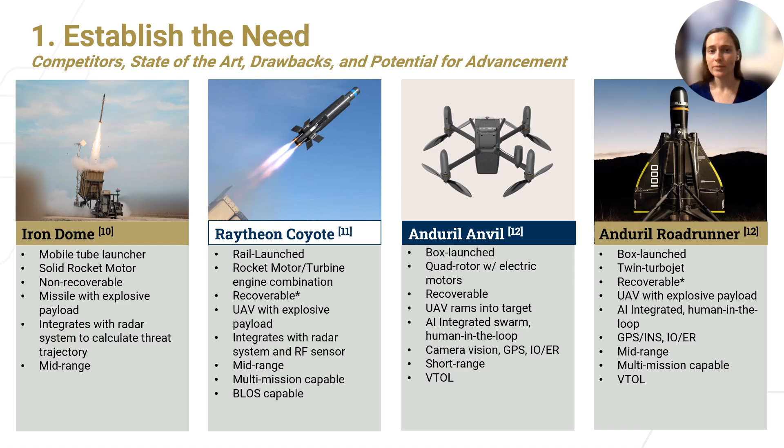The downside to all four of these systems, though, is their cost, ranging from about $40,000 for an Anvil interceptor to $100,000 or more for variants of Coyote and Roadrunner. Coyote, Anvil, and Roadrunner are reusable, though, depending on the mission executed and whether or not an explosive payload was required. All of these systems require pre-positioning and planning prior to their deployment in the field.

Going a little deeper into each of our competitors' missile defense strategy, Iron Dome's effective radius ranges from about 5 to 70 kilometers with Tamir interceptors, and is most effective as part of a layered defense strategy. Due to the limited number of interceptors available, the launchers are integrated with radar systems to selectively intercept only incoming missiles on trajectory to hit critical infrastructure. The system is highly effective, boasting an intercept success rate of greater than 90%, but it's also costly, ranging from $50,000 to $100,000 per interceptor.

The payload is a fragmenting explosive, weighing about 11 kilograms. The Coyote system, developed by Raytheon, can either be rail-launched or launched from a sonobuoy canister, depending on the variant. Block 1 Coyote, shown below, can be equipped with a variety of sensors, including weather observation for NASA, communications relays, or explosive payloads for the counter-UAS missions.

It is designed with deployable wings and can loiter for an extended period of time. However, it is limited by weather conditions and only operable in light rain and moderate winds. The Block 1 Coyote carries a payload weighing about 2 kilograms. Payload capacity of Blocks 2 and 3 Coyote are not publicly available.

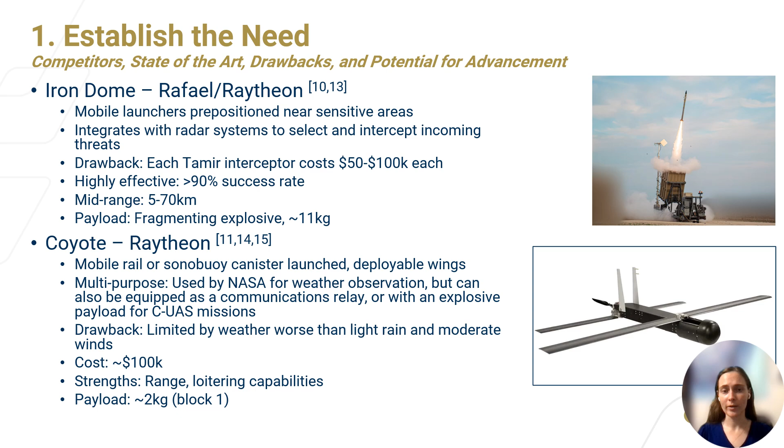Anduril's integration with Lattice enables a layered defense strategy leveraging multiple types of interceptors to counter a variety of threats. Both Anvil and Roadrunner are launched from boxes, which can be integrated into urban environments and provide monitoring of UAV health and status. Anvil is a fast, lightweight interceptor, achieving speeds up to 200 miles per hour at a cost of about $40,000. However, it is limited in range and endurance. Only the Anvil M variant carries an explosive payload, estimated at less than a kilogram.

Roadrunner is designed for larger counter-UAS missions. Its top speed is estimated to be about 450 miles per hour, with an endurance between 30 and 60 minutes. Cost is the limiting factor for Roadrunner interceptors, from about $100,000 to $500,000. Payload data is not published by Anduril, but estimated to be between 10 and 20 kilograms. Each of these four interceptors discussed has unique strengths and weaknesses, and a slightly different take on the trade-off between cost and performance.

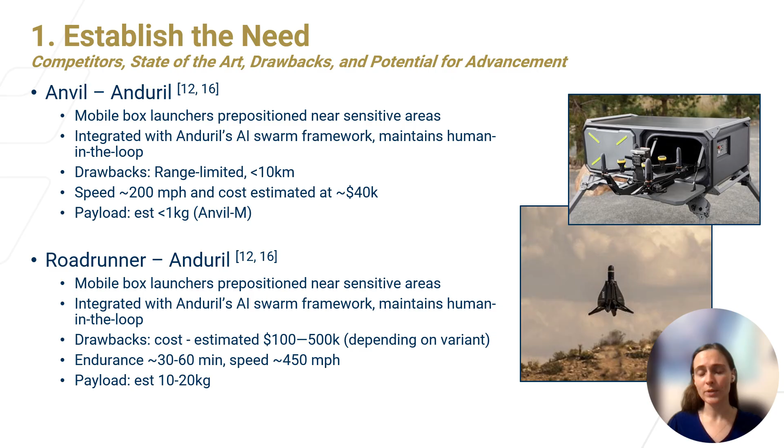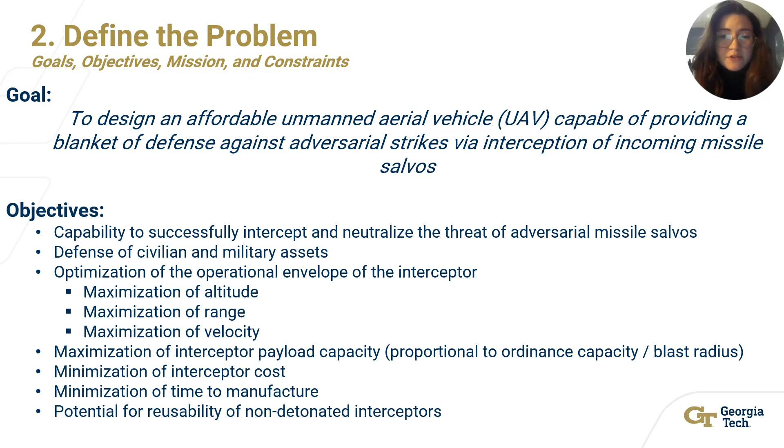Thanks, Caitlin and Trent, for establishing the needs. I'm Lily, and I'll be covering problem definition. The goal to solve this problem is through designing a low-cost drone which can defend against incoming salvos. This will be achieved by completing 7 objectives, with themes of maximizing coverage of the interceptor while minimizing the cost and time to manufacture. Through a concept of operations, or ConOps, the proposed mission is visualized.

Initially, infrastructure will exist like hangars, runways, and local ground stations. There, the system will be ready when the possible detection of an incoming threat is received by existing missile defense system satellites. Once the signal is assessed, it is determined to be a threat. The request to launch the interceptor will be sent to the local ground station. That's when last-minute preparations like opening the hangar doors and activating the interceptors are triggered before launch.

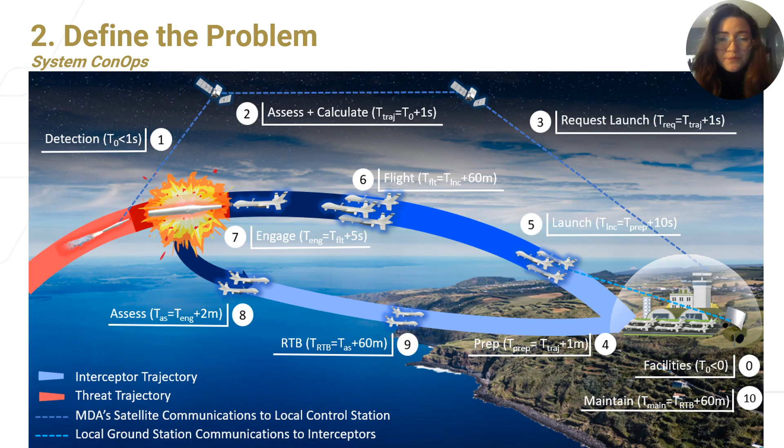While in flight, the drones receive updates from the local ground station. The swarm of interceptors will engage the salvos as necessary, and remaining interceptors will return to base, or RTB. While awaiting the next mission, maintenance can occur. All of these mission stages correspond to some functional need of the system. To complete a Defeat the Threat Salvos mission, it must be able to be launched quickly, detect and track the missiles, fly, navigate, receive commands, destroy, and communicate back to the ground system.

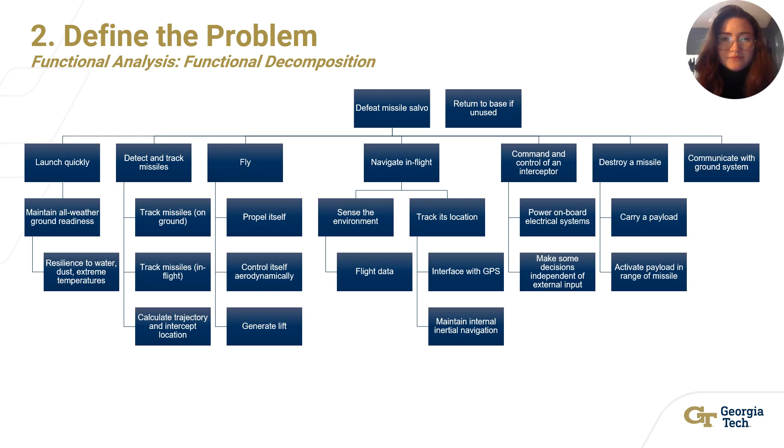However, each of these functions is more complex than that. Like the function of flying can be examined as needing to propel itself, control its aerodynamic features, and generate lift. The mission stages can be simplified from 10 to 5, consisting of pre-launch, launch, in-flight, defeat, and reset. This flow block diagram combines the mission objectives with the needed functions to better understand the problem.

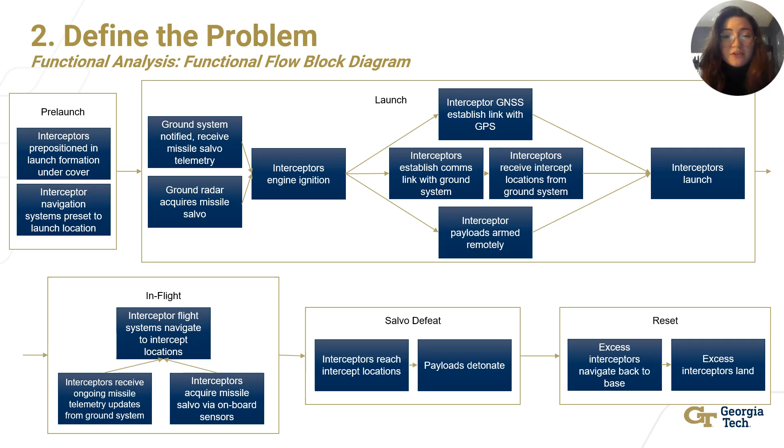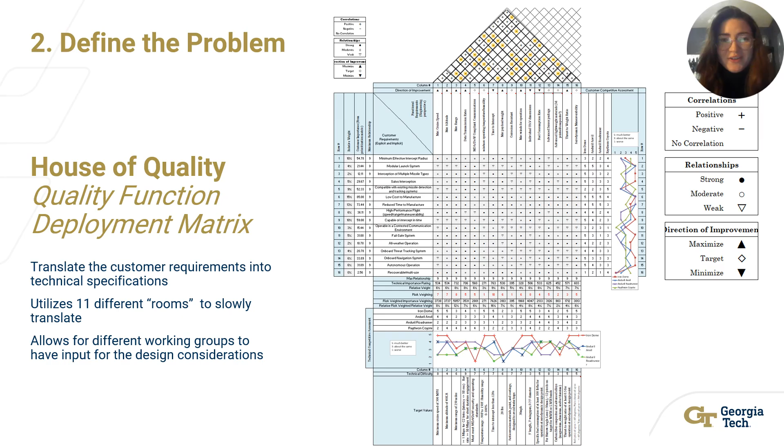With such an in-depth understanding of the needs, the system can begin to be defined. This is completed by a house of quality with 11 different rooms, starting with the requirements from the customer. These were explicitly listed as items such as being low cost, quick to manufacture, and actually intercepting. However, through further understanding the customer's perspective, unknown customer needs like interception of multiple types and all-weather operations are identified.

Engineers can translate their customer requirements into measurable characteristics with target values like having a large range of 250 miles, carrying up to 20 pounds of payloads, or having a thrust-to-weight ratio of greater than 0.5. These ensure the proposed solution is actually meeting customer needs.

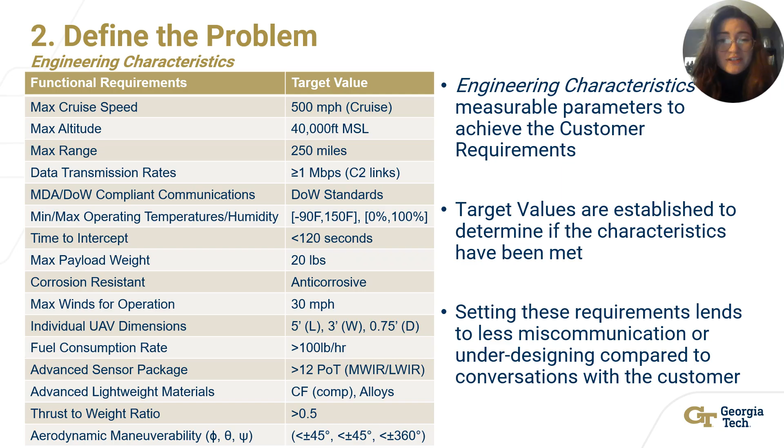As shown in room 3, it's critical that engineering requirements are actually capturing the voice of the customer, so areas of strong relationships, like many requirements capturing the need of reduced manufacturing time, are identified.

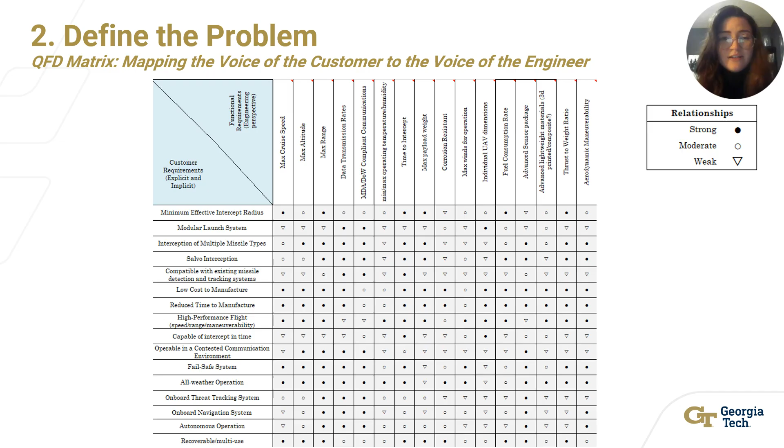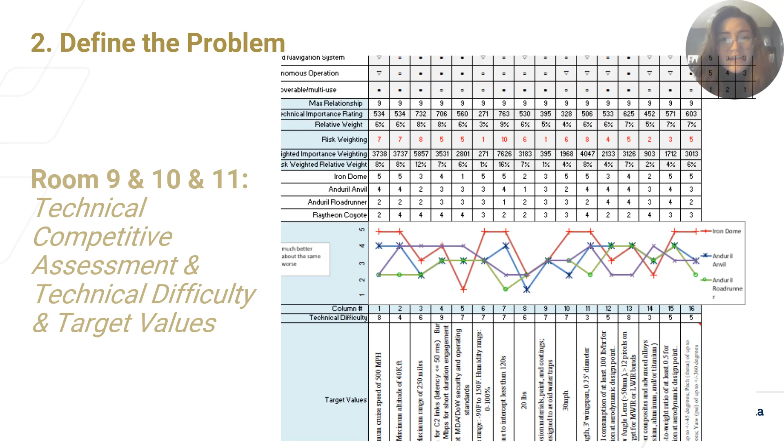The remaining rooms show the correlations among the functional requirements, the ratings of customer needs, the importance of engineering characteristics, and assessing existing products, and a technical assessment of products against our solution.

In this section, we identify what matters most for choosing the right interceptor configuration. Our guiding idea is simple. The propulsion choice and the airframe choice determine whether the system can actually intercept missiles fast enough, high enough, and cheaply enough to scale. We start with the major performance metrics from the requirements. We care about time to intercept because the vehicle must reach incoming missiles before they hit defended assets.

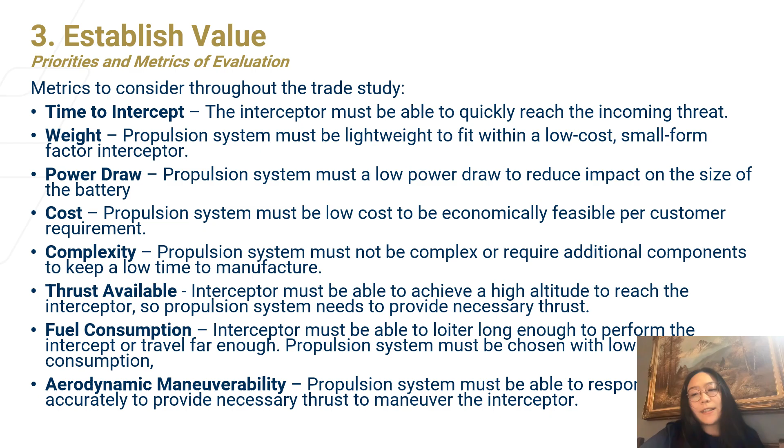Weight and power draw matter because this is a low-cost interceptor. Every subsystem must stay compact and efficient. Cost and complexity directly connect to manufacturability, one of the customer's highest rated needs. And thrust, maneuverability, fuel consumption, and altitude performance all determine whether the interceptor can actually reach and destroy high-speed threats.

To analyze this systematically, we then break the system into the major subsystems: propulsion, instrumentation, payload, power, and structure, because each contributes differently to altitude, speed, and responsiveness. The instrumentation block becomes especially important since navigation, tracking, communication, and guidance sit at the core of missile interception.

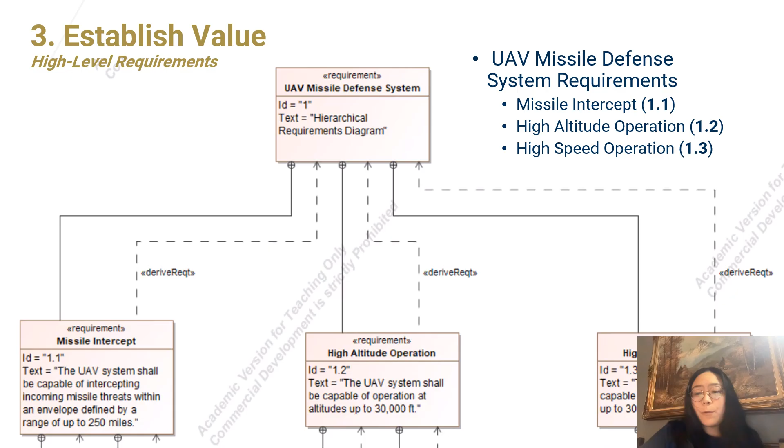Using the subsystem level requirements and the decomposition in the slides, we map everything back into high-level system needs, including missile intercept performance, high-altitude flight, and high-speed travel. This set of metrics forms the basis for the trade study. They tell us what matters most for the stakeholder needs and system ConOps when we compare propulsion and airframe combinations. And these are demonstrated in detail.

For propulsion, we evaluate 4 families: turbo alternators, turbofans, turboprops, ramjet or scramjet systems. Turbo alternators give high power to weight ratios and low cost. Turbofans offer very high thrust and altitude capability, but at higher cost and complexity. Turboprops provide fuel efficiency at lower speed, making them attractive before an intercept. Ramjets and scramjets provide extreme speed but come with major development risk, material demands, and cost uncertainty.

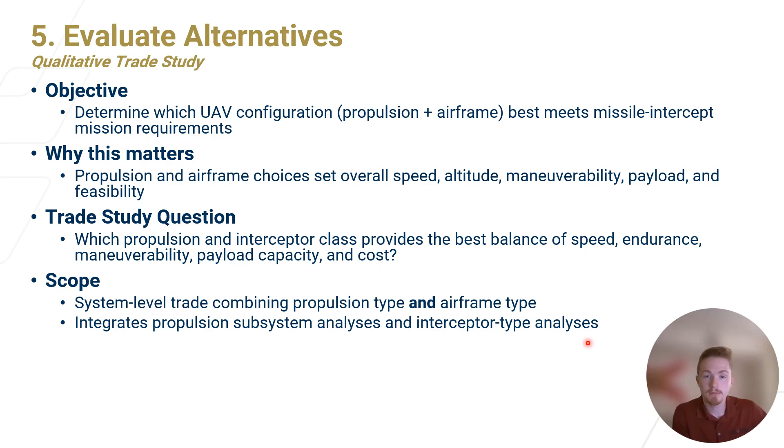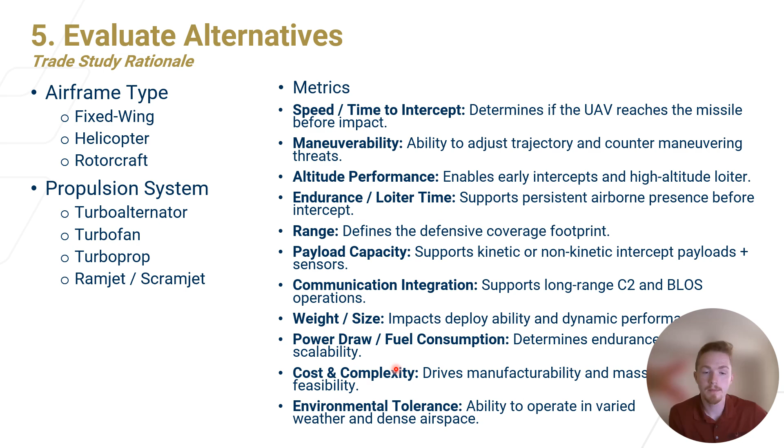As for the scope, the system-level trade combining the propulsion and airframe type is what we will be performing. We'll be integrating the propulsion subsystem analyses and interceptor type analyses. We'll primarily be concerned with the following metrics: speed, or time to intercept. These two metrics are very intimately connected. Maneuverability, altitude performance, particularly the maximum altitude envelope. Endurance, or loiter time. Range, payload capacity, communication integration, weight and size, power draw and fuel consumption, cost and complexity, and finally, environmental tolerance.

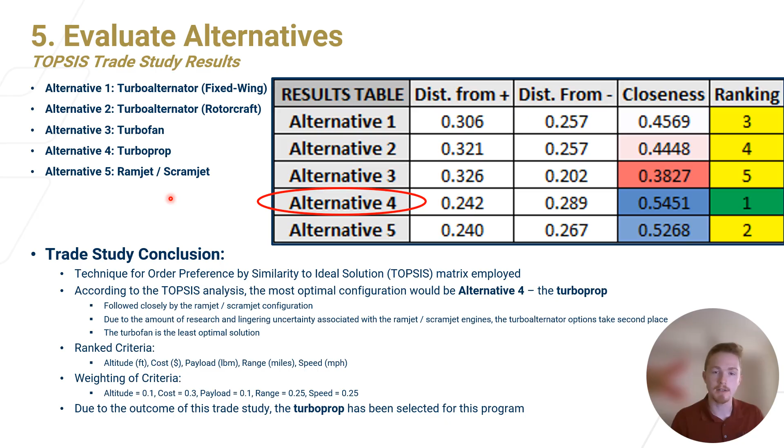Hi, my name is Noah Cortez, and I'm going to go over the concept that we landed on.

So the design that we landed on is a fixed-wing turboprop design. We found that was the best trade-off and the best point for cost and payload capacity. This comes in at about $60K per interceptor, which is much cheaper than the existing missile interceptors on the market right now. This has a 20-pound explosive payload, which is comparable to other interceptors that are targeting this kind of high volume, low cost, low tech missile.

It's got a 250-mile range, 500 mile per hour cruise speed, and a 30,000-foot ceiling. We emphasize COTS technology, standard parts, and manufacturing processes to make it easy to produce and maintain, to keep the system operational downrange as much as possible.

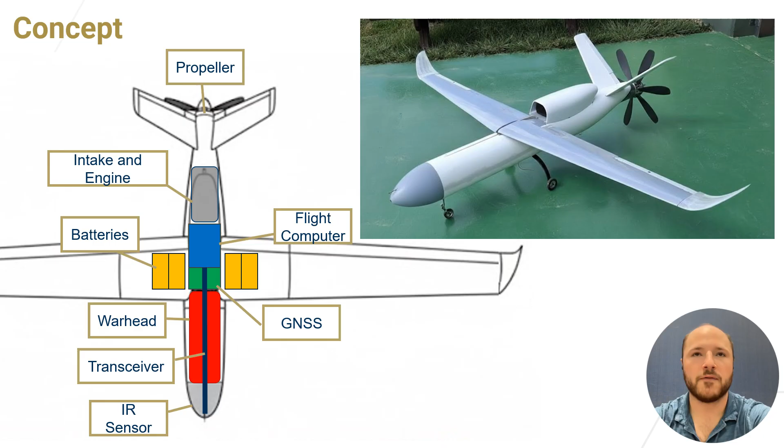You see we have a turboprop, we have the intake in the engine, we've got batteries, flight computer, the explosive warhead, transceiver, and an IR sensor for tracking the missiles in flight, in addition to receiving telemetry updates from the ground systems and the missile defense network.

The operation that we have here is the facility will create a dedicated hangar and short runway for the system. To have an alert posture, there's an elephant walk arrangement for salvo defense with 18 interceptors ready to go at all times. And then there are personnel and equipment on hand in the hangar to prep the next round of interceptors for the next salvo.

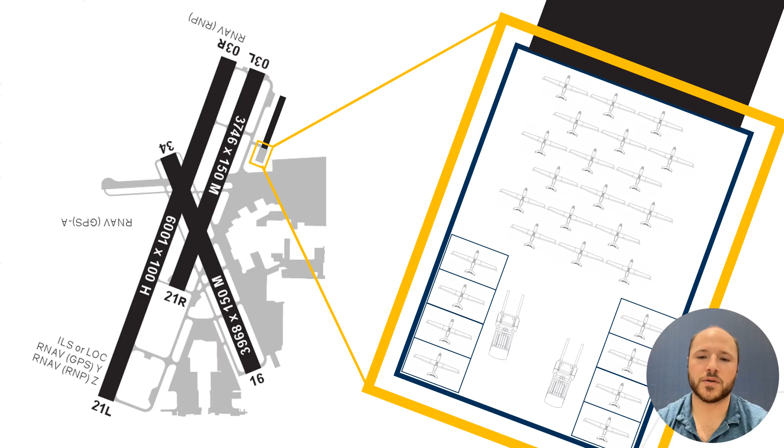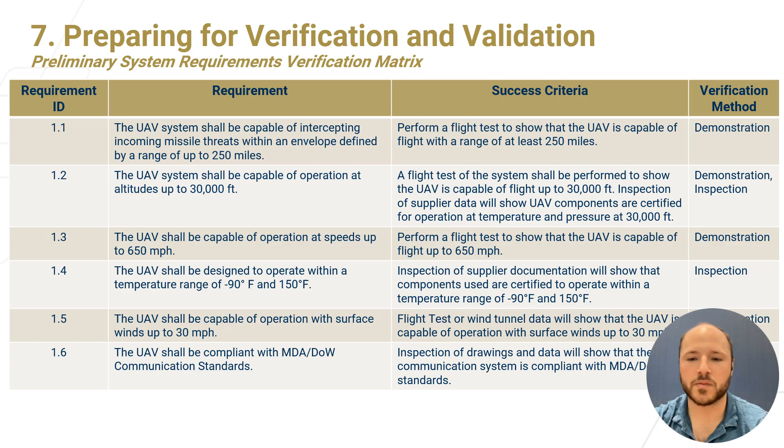Okay, so now I'm going to talk about preparing for the verification and validation of our requirements. We had a good blend of demonstration, analysis, test, and inspection. We leaned most heavily on demonstration to show that our system meets the performance requirements. Where possible, we're planning on doing some live fire testing with some real missile systems to prove that it does work as we say that it works. These are just all of the verification testing methods that we have.

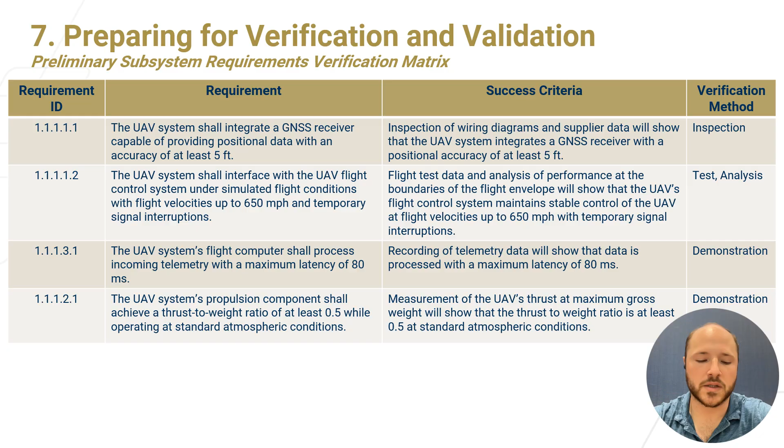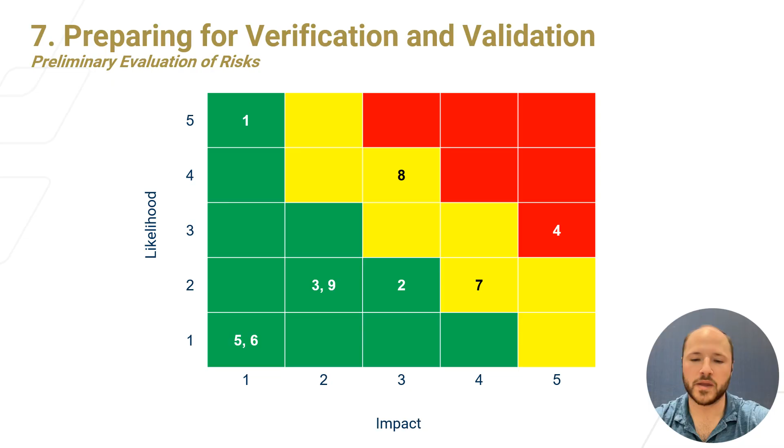So here's the risk matrix for our design. With the missile defense mission, failure has a very, very high impact because almost certainly you're going to have loss of life depending on the accuracy of the adversary missiles. So we went ahead and mitigated a bunch of risks baked into the design directly, but there are three that I want to focus on that we can see in the yellow and the red. That's 4, 7, and 8.

So risk number 4 is that competing programs remove support for the program. The way that we're going to address that is to rapidly achieve program milestones to reduce the amount of time for the program to be killed. If we can move quickly, then we can get through our program faster than somebody can realize what's going on and try and kill it, and we can field our systems quickly.

Number 7 is that the adversaries will send mixed salvos of high-tech and low-tech missiles. The way that we're mitigating that risk is maintaining that communication link between the interceptors and the ground systems and the existing missile tracking networks to make sure that we have high accuracy and high resolution telemetry data, so that the interceptors are talking to one another in the air, and then interfacing with existing missile systems, especially higher end ones like the Patriot missile systems, to make sure that for a mixed salvo, we are defending those appropriately.

And then number 8, the dedicated hangar protects the interceptors from the harsh environment so they can maintain a ready posture at all times.

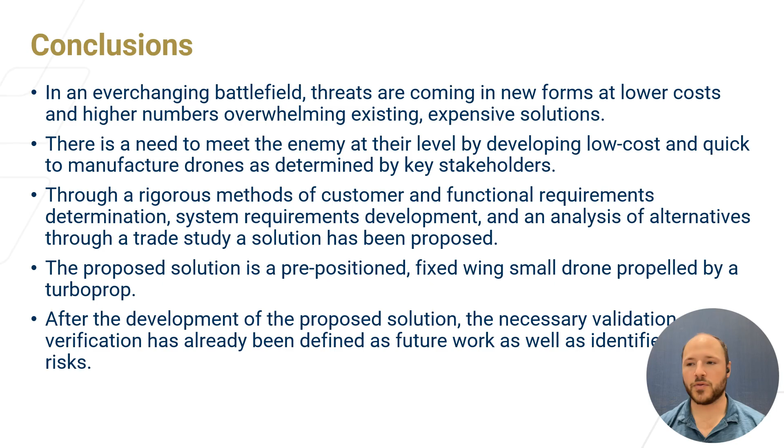All right, so in conclusion, our design is effective. It meets the performance specifications. It especially meets the cost and maintenance and sustainment requirements. And it provides the customers with the capability to defend their facilities against high volume, low cost missile attacks, which is a particularly high threat in certain regions of the world, and it does so in a way that's not cost prohibitive and is sustainable, to let those facilities or the departments as a whole redirect those funds to the operations that matter.